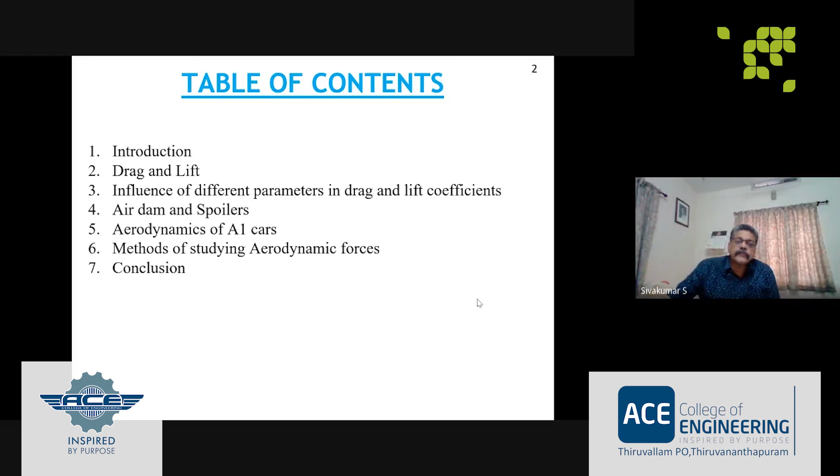First, let us see what is aerodynamics. In simple words, we can define aerodynamics as study and analysis of different forces acting on a body moving in air. When a body moves in air, there will be different types of forces acting on it. A study of that is known as aerodynamics. It has got application in different areas of engineering - aerospace engineering, design of automobile, prediction of forces and moments in ships and sails, in design of bridges and buildings, considering wind loads. Of this, our discussion is the second one, design of automobiles.

Now let us see what are the forces in aerodynamics: Lift, drag, weight, and thrust. Lift is the force acting normal to the direction of flow of air. If due to lift the body moves upwards, or if the direction of lift is upwards, we can say it is positive lift. And if the lifting force is downwards, we can say negative lift.

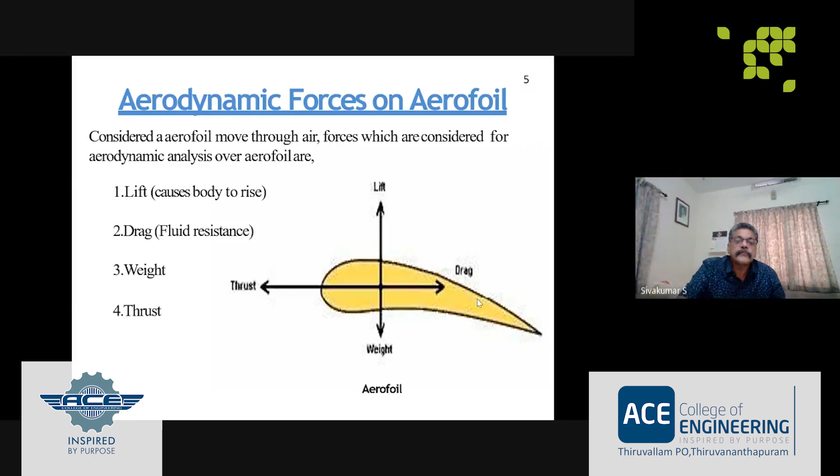So if you take a car, many parameters or factors are decided by the design of the car. I told you, one is fuel efficiency, then appearance of the car, stability of the car at high speeds, and noise level. These are the advantages of aerodynamics principles in the design of cars.

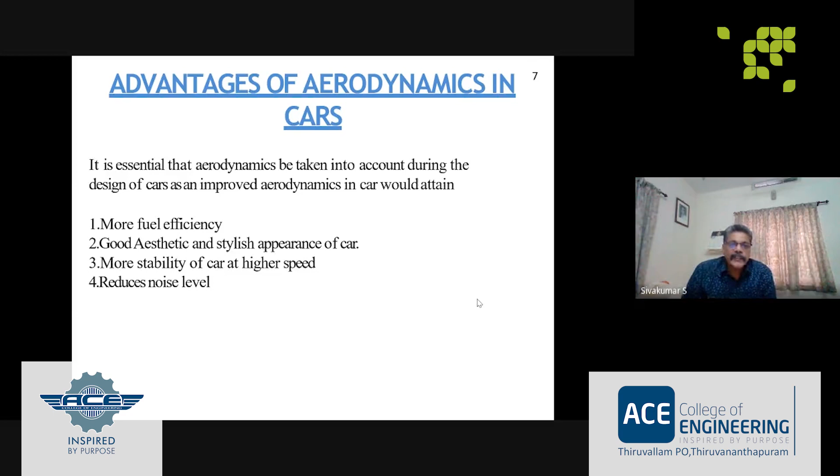I have already given you some idea about drag force. Here you see the expression F is equal to half CDA V square, where F is the aerodynamic drag force, that is the drag force created in the frontal area due to pressure of air acting on the frontal area.

And C is the coefficient of drag. Coefficient of drag is a measure of drag force. And A is the frontal area. And V is the velocity of the object.

So when a body with frontal area A is moving with velocity V in air, the drag force created will be half CDA V square. Here we can say the drag force created depends on the coefficient of drag and the square of the velocity.

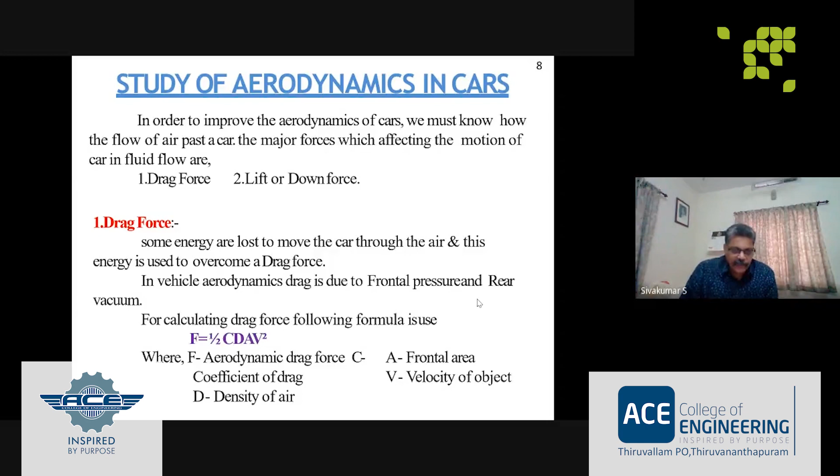I have told you about drag coefficient. Drag coefficient is a measure of aerodynamic efficiency, and this drag coefficient varies with the shape of the body. Here, the drag coefficient for some of the shapes are given.

For sphere, the drag coefficient is 0.47. Half sphere, 0.42. And streamlined body, it is very less, like a teardrop. For a streamlined body, it is 0.04. And streamlined half body, it is 0.09.

These are the drag coefficients calculated by conducting tests on different shapes. And we have seen the drag force depends on coefficient of drag. So the thrust you require depends on the shape of the body.

Where if a car with teardrop shape, that is a streamlined body, moves in the air, it may require only very less force to overcome the drag, because the value of CD is very less, 0.04.

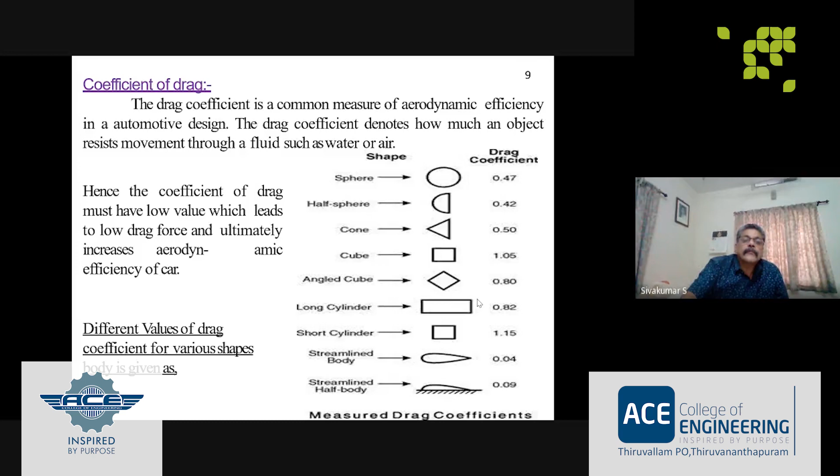Now let us see what happens when a flat plate moves normal to the air. It's moving in the forward direction, so air pressure will be acting against the body. It is kept normal to the flow, so air pressure will be acting on one side. As it moves through the air, it will be continuously replacing the air in the volume of space it occupies. So what will happen? Vacuum will be created in the rear end.

When vacuum is created, what will happen? After crossing the body, the air particles will be rushing towards the center, so some sort of turbulence will be created. This is the movement of a flat plate normal to the airflow.

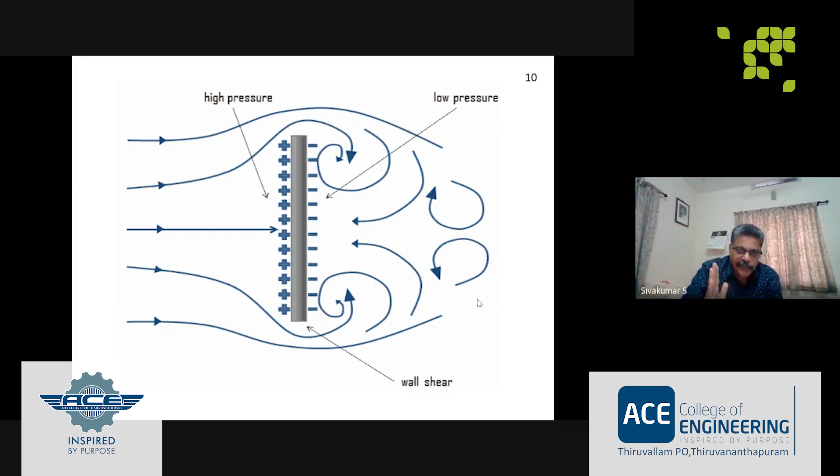You may think, why is this important here? When a car moves in air, first you start from the bottom. There is the bumper line, frontal area, then above that the hood, then windshield, then top of the car, rear window, trunk. So the air passes through different parts of the car, from the bumper, frontal area, hood, windshield, top of the car, rear window, and trunk. And the sideways flow will just be flowing over the doors.

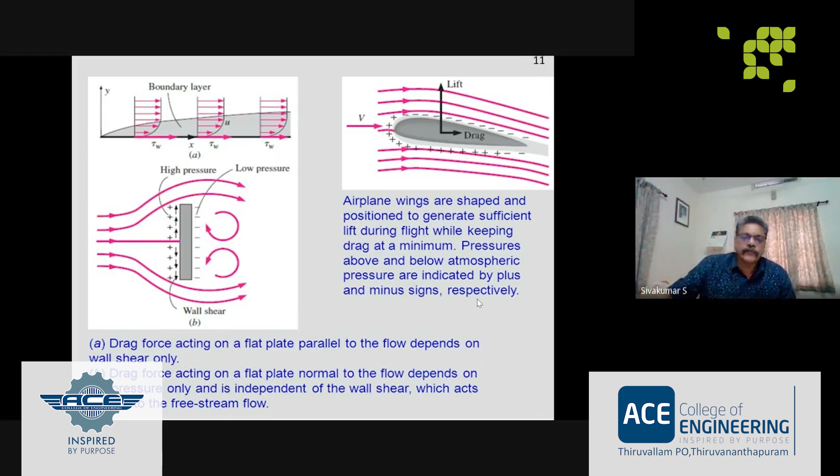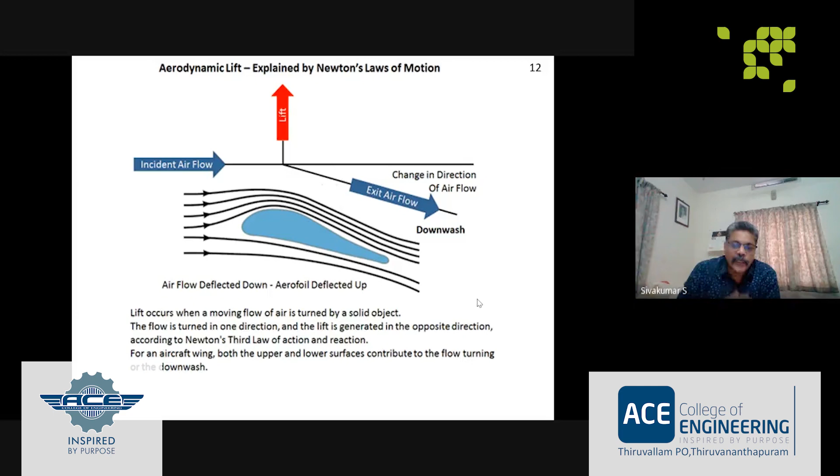Now, here the explanation is given using Newton's third law of motion. When air particles move over the wings, the speed increases at the top and is reduced at the bottom. According to Newton's third law, a lift occurs when a moving flow of air is turned by a solid object. After striking the surface, if the air particles take a turn downwards, then a force will be created in the opposite direction - that is the lifting force.

Now, the reaction of force on an inclined plate. We have seen what happens when a plate is kept normal to the flow of air, and what happens when it is kept parallel to the flow of air. Now, when it is kept at a particular angle, there will be two components: one is the upward force, that is the lift component, and the other is in a direction opposite to the movement of the vehicle, in the direction of air. That is the drag component.

Now let us see what happens to the upward force and the backward force when the angle of inclination is changed. This angle is very important. Take the bonnet, it is at a particular angle with a slight inclination. Take the windshield, it is also at a particular angle. So the lifting and dragging forces are decided by all these parts. So, reaction force on an inclined plate.

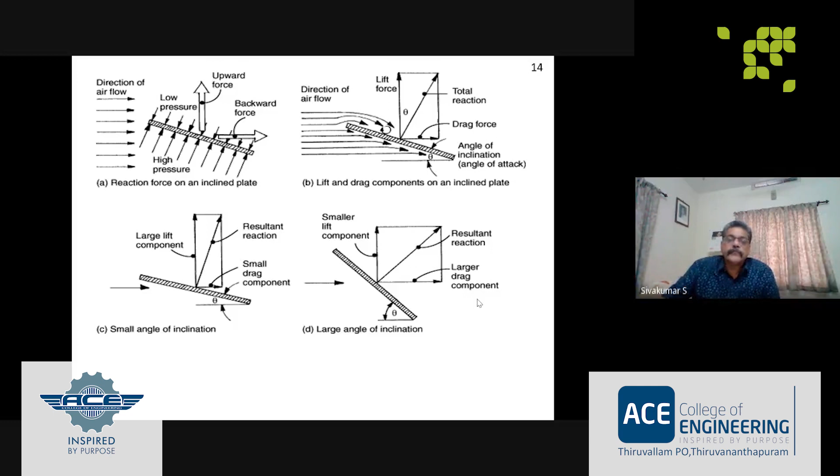Now let us see what happens when the air flows over a streamlined body. We have seen the teardrop shape. When the air particles move over the body, if it is a streamlined body, there will not be any separation between the air and the surface of the body. The air will flow over the body along its surface till the rear end and come out.

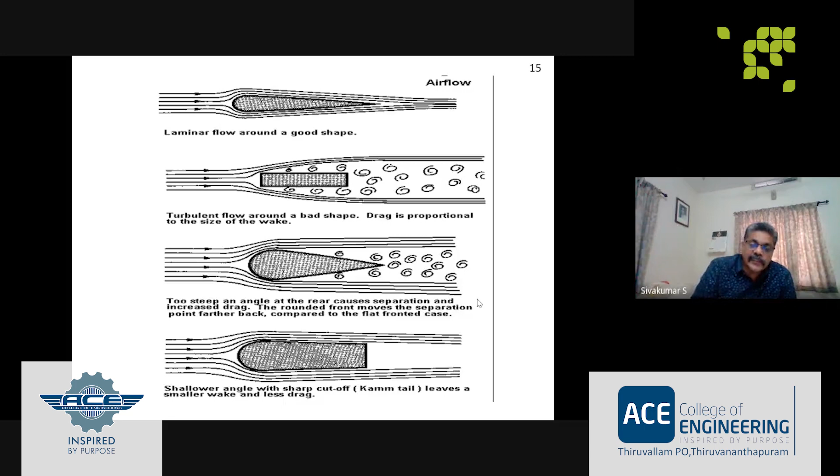Take the last one, the shallower angle. The angle of inclination of the fourth one is lesser than the previous two. So what happens? It's a streamlined shape, but at the end there is a possibility for wake, though it happens only after the rear end, so the effect will be less. Air particles strike the body, move along its surface, and cross the rear end.

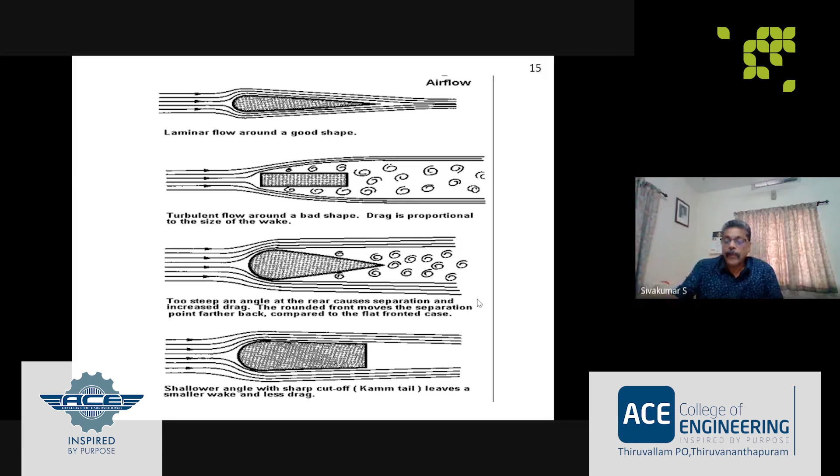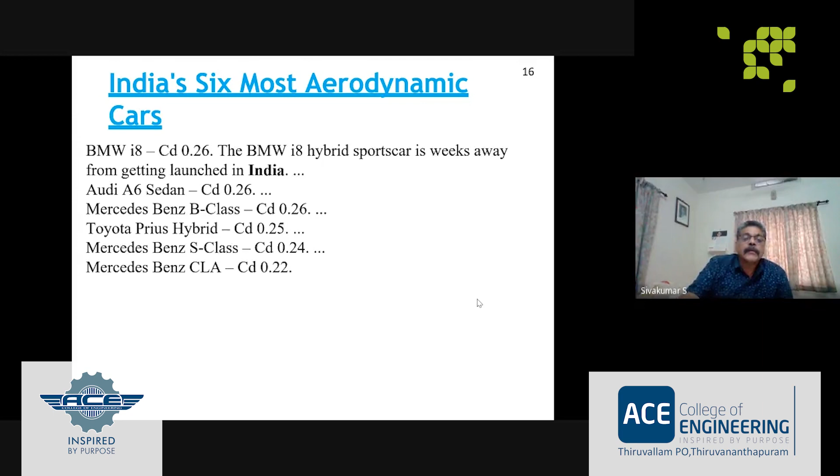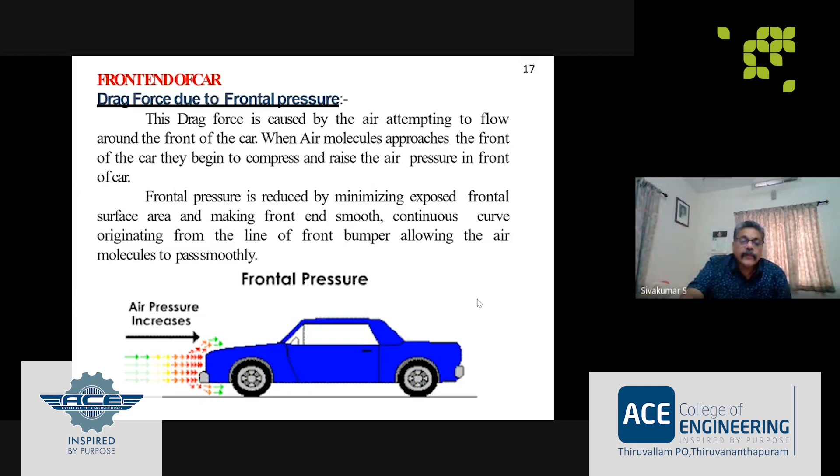What happens when air flows over the roof of the car? In certain cases, when it moves over the roof, the air particles continue to move in that direction, so there will be flow detachment. Due to the flow detachment, the air particles rush towards the vacuum created behind the window and the trunk.

As the air particles move over the roof, they continue in that direction, so there will be flow detachment. Due to flow detachment, a vacuum will be created, and that creates the rear vacuum. Due to the rear vacuum, there will be drag.

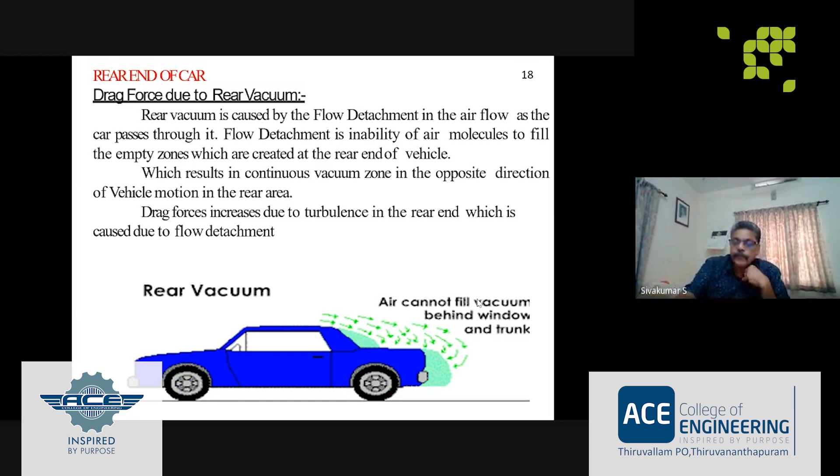Then when it moves over the roof, normally the velocity will be high, so the pressure will be less, so there will be a lifting force. Now you see the backside. When the air particles continue to move, what happens behind the window and above the trunk? There will be a vacuum created, so there will be a lifting force, because air is flowing to the bottom also. The lift is the force acting upwards, and it is created mainly due to the pressure difference between the bottom of the car and the top of the car.

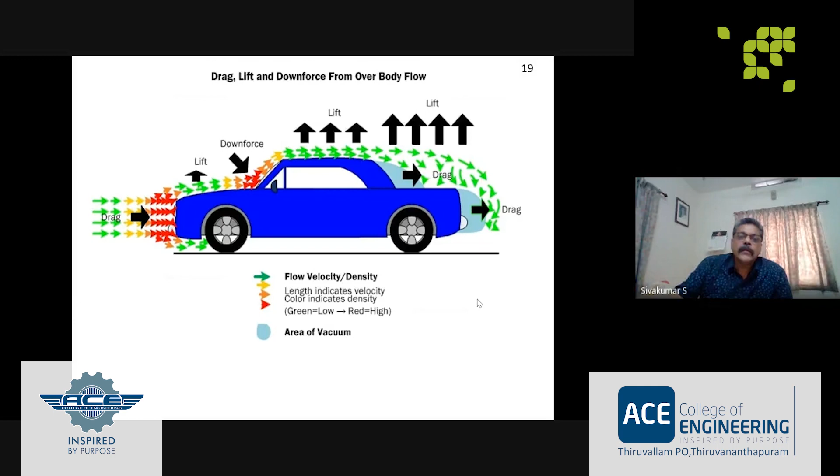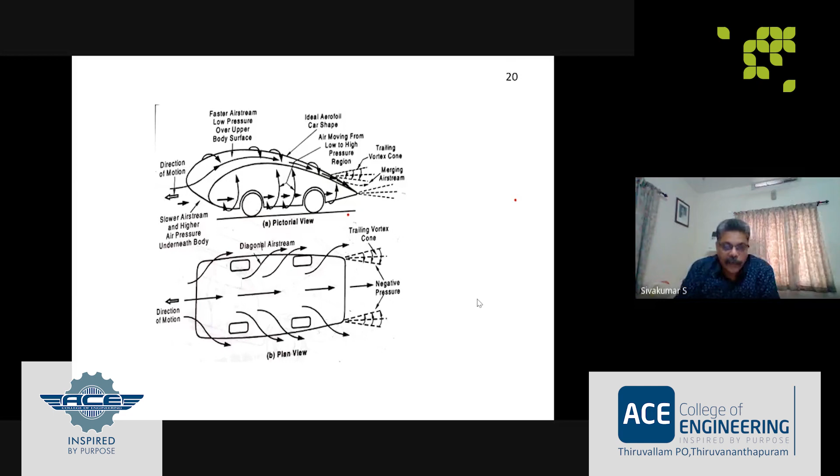What will happen if the car is lifted? The driver may lose control. This may happen at very high speeds. When the speed is very high, if there is considerable coefficient of lift, there is a possibility that the contact between the tire and the road may be lost. When there is no contact between tire and road, the driver may lose control.

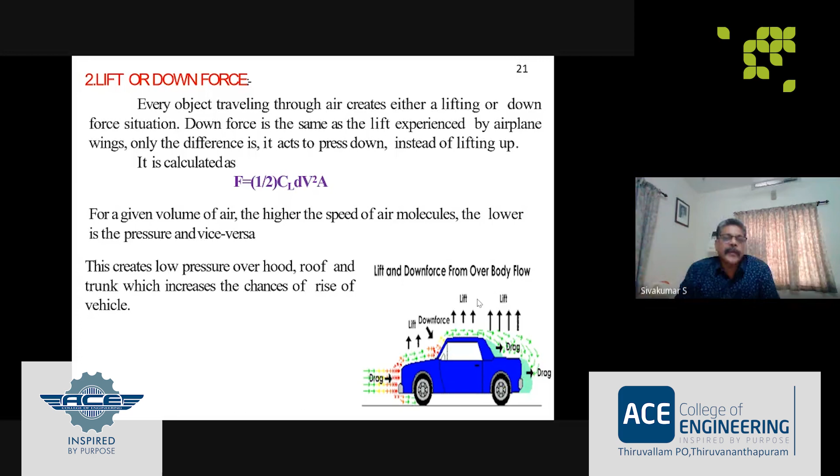Now, one thing we know in case of coefficient of drag: by streamlining the body of the car, the separation points can be shifted beyond the rear end. So the drag can be reduced.

And like that, the coefficient of lift can also be controlled by making small variations in the shape of the car, because the coefficient of lift is decided by the shape of the car only. If there is provision for reducing the pressure of air at the bottom of the car and increasing the pressure at the top, then there will be a downforce.

This downforce can be created because at high speeds, if there is a lift created, and if the lift is more than the weight of the car, then the car may be lifted from the ground and the driver may lose control. To avoid that, we can make small provisions in the car to keep the pressure below the car to a certain level. There are many parameters we will see one by one.

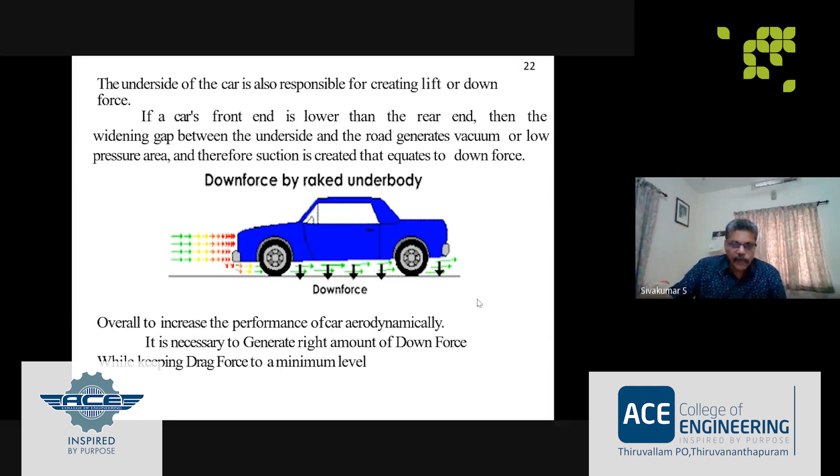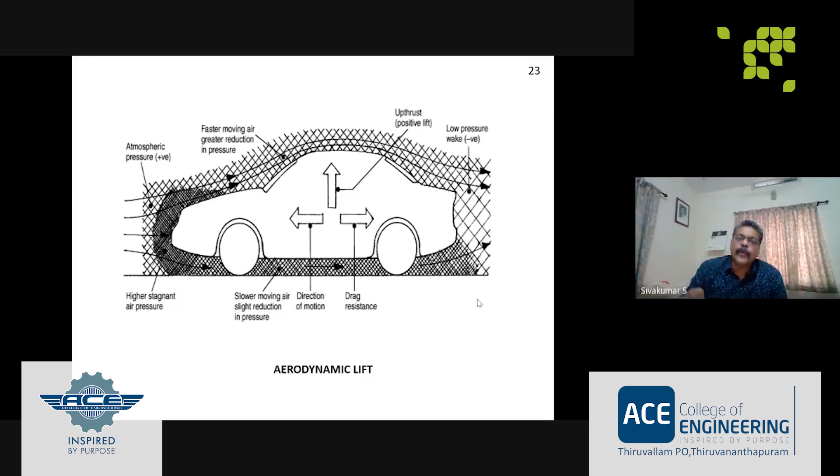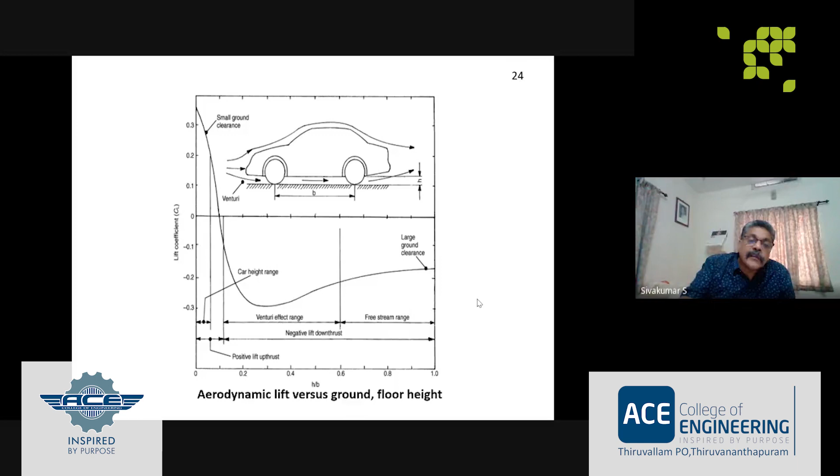You would have noticed if the gap between the car and the road is very less, then there is a possibility for positive lift. And if it is moderate, you can see how the lift coefficient varies with H by B. So make it a point, lift coefficient varies with floor height. The floor height can be varied and we can control the lift coefficient. This is what we have already discussed.

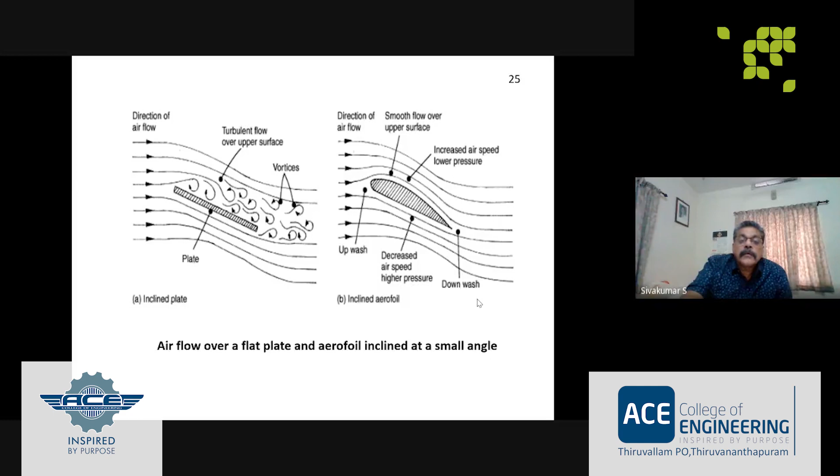Now, front end nose shape, the front side, the bumper area here — you can keep the nose tip either pointing downwards, pointing at the center, or pointing upwards. The conditions will be different for different positions.

Suppose if it is pointing downwards, what happens? Only a very small quantity of air will be flowing through the bottom, and most of the air particles will be moving above the car. The diagonal flow will not be there, or even if it is, it will be very small.

Then if the tip is at the center, there will be flow above and below the car. And if the tip is pointing upwards, what happens? More air is going to the bottom of the car, and only a very less quantity flows above the car.

In that case, what can happen? More quantity of air flows to the bottom, very little air moves above the car, so the pressure at the bottom will be high. There will be airflow from the bottom to the top. You can see the airflow above the car is less, so the pressure will be less at the top. Below the car, more quantity of air is there, so pressure will be slightly high.

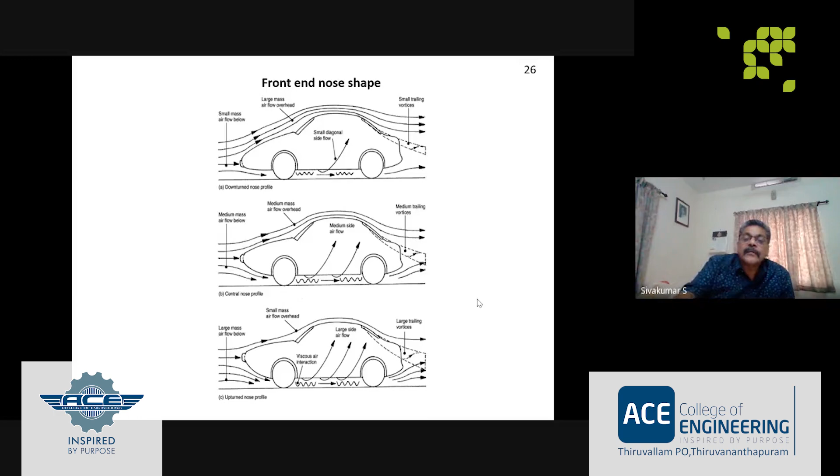So the air will start moving from the bottom to the top, and that will lead to some vortices, because there is flow in different directions. Some vortices will be created at the rear end.

Now, there is a wind tunnel setup, an experimental setup, which is used to study the forces acting on a body. You can make a prototype of the vehicle and keep it inside the wind tunnel. In the wind tunnel, there is provision for passing air at different speeds, so using that provision you can vary the speed of air flowing through it.

The body is already kept there. You can make prototypes in different shapes, keep it inside the wind tunnel, and send air at different speeds. You can study the forces acting on it, and from that it is possible to calculate the value of CD and CL.

CD is coefficient of drag, CL is coefficient of lift. Here, upward nose, central nose, and downward nose, three different prototypes of same dimensions are tested in a wind tunnel, and the results are as follows. For upturned nose, CD is 0.24. For central nose, CD is 0.223. Downturned nose, 0.224. There is no much difference in CD, almost the same, only a slight difference.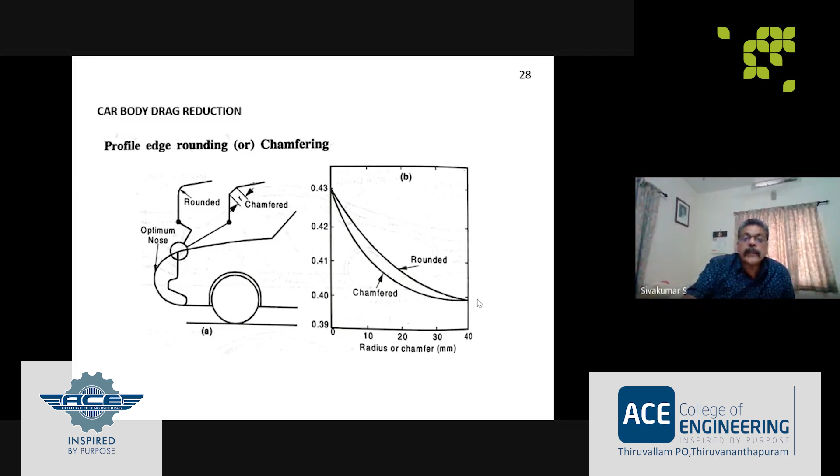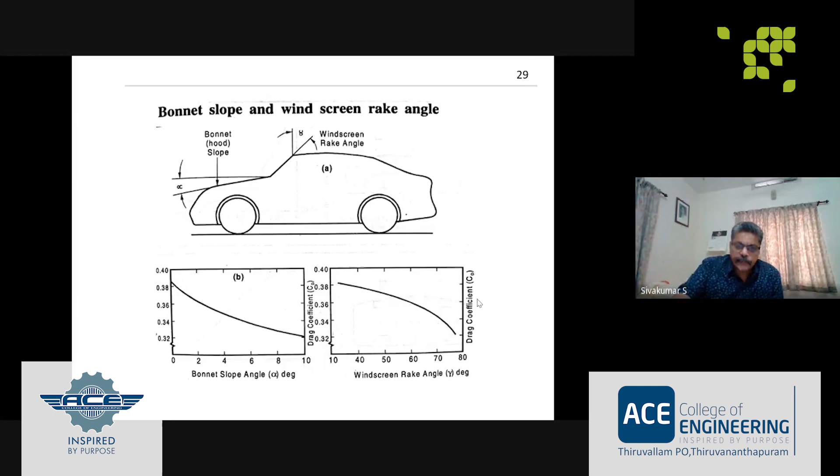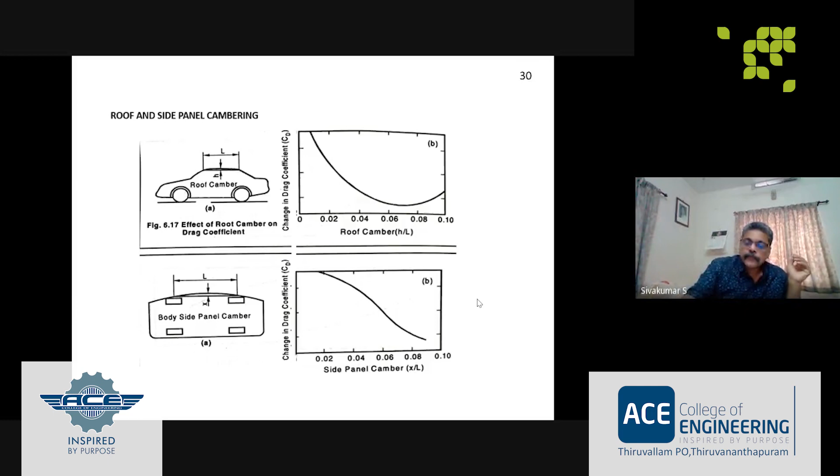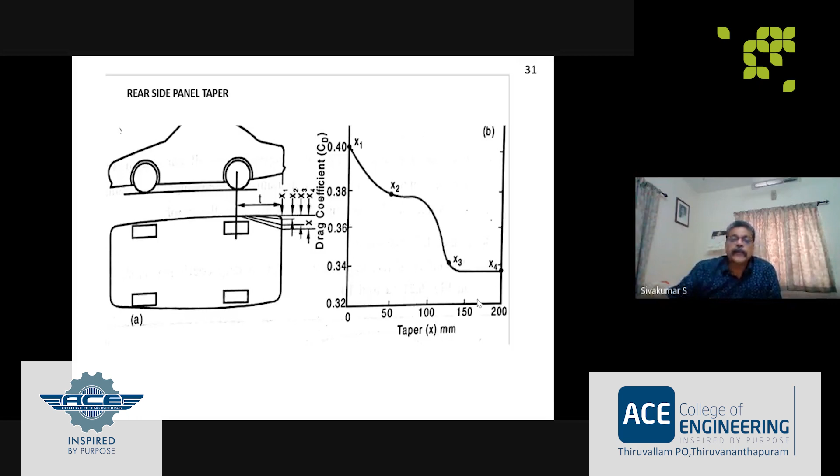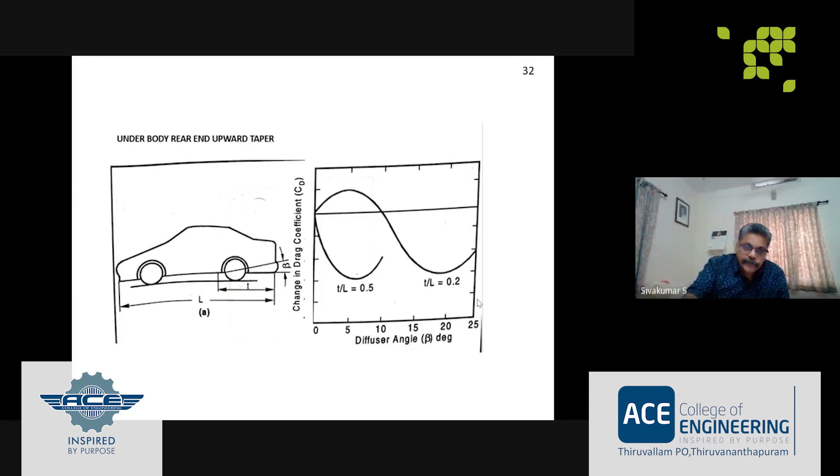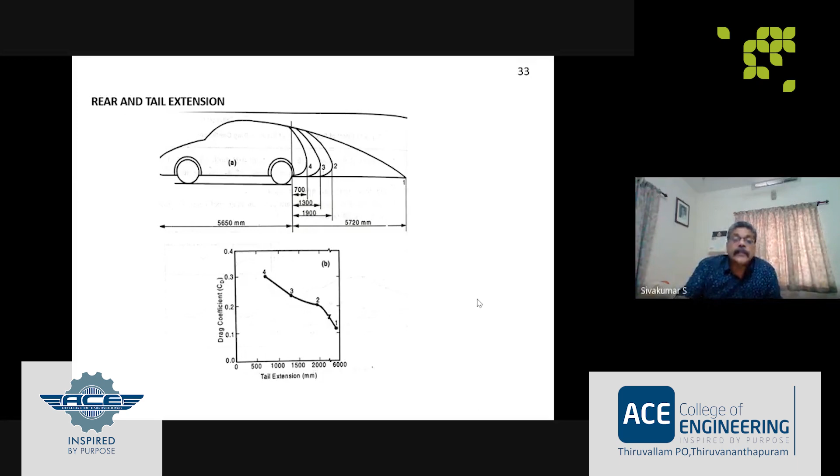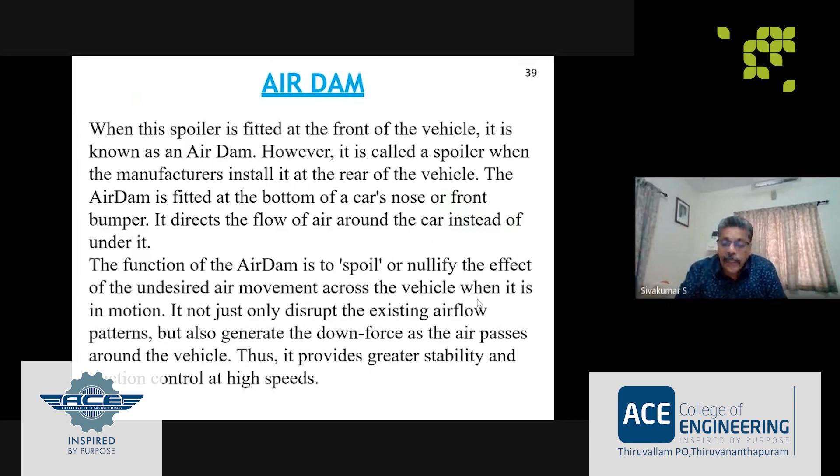Then air dam, I'll show you if it is clear. If a spoiler is provided in the front of the car, it is known as air dam. Air dam directs the flow in different directions.

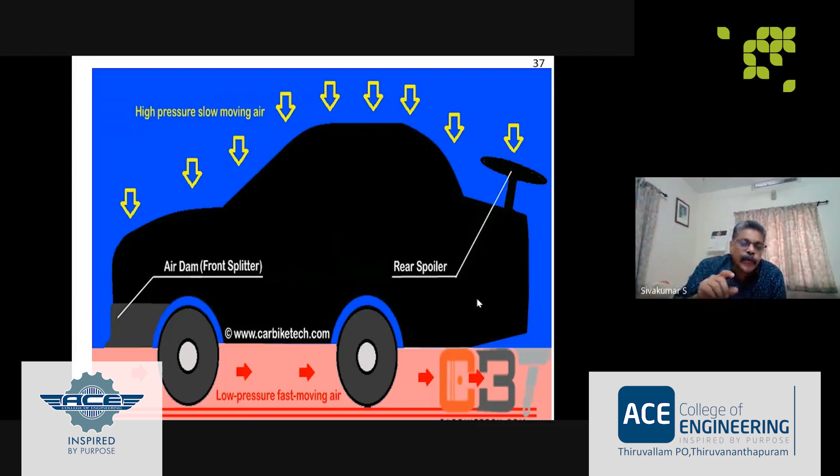So the quantity of air flowing through the bottom will be reduced. When the quantity of air flowing through the bottom is reduced, naturally there will be less pressure. When less pressure is created, and at the top if there is high pressure, the car will be pushed downwards, and there will be very good contact between tires and roads.

Yes, see, air dam is provided in the front. Spoilers you can provide at the rear end, and there is low pressure because this air dam directs air sideways also. So the quantity of air entering the bottom of the car will be less, so low pressure will be created there. At the top, more quantity of air flows over the top.

Because it is the purpose of the air dam to direct air in different directions, it will reduce the flow of air through the bottom and increase the flow of air through the top. So at the top, high pressure, slow moving air will be pressing the car against the ground. So always there will be a push downwards.

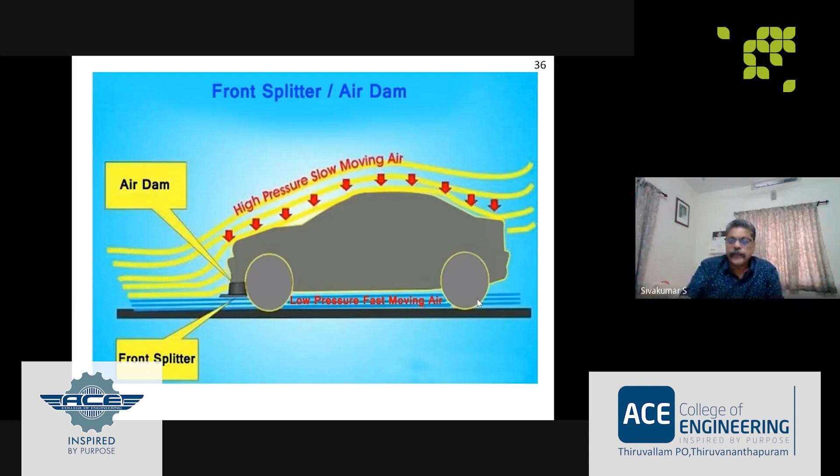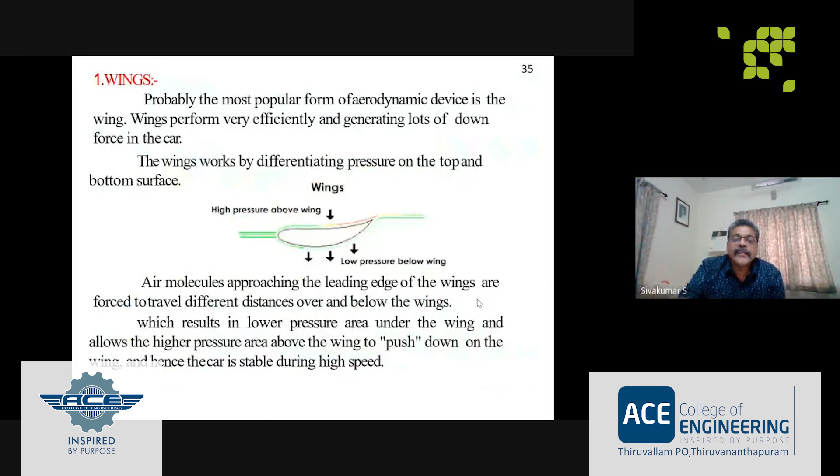Then scoops, you would have noticed in cars, on the front side. The purpose of scoop is something different. Here, this is scoops at the center. There is an opening, and what happens is when air is approaching the front side, air will be getting into the scoops. And what happens there? We'll see.

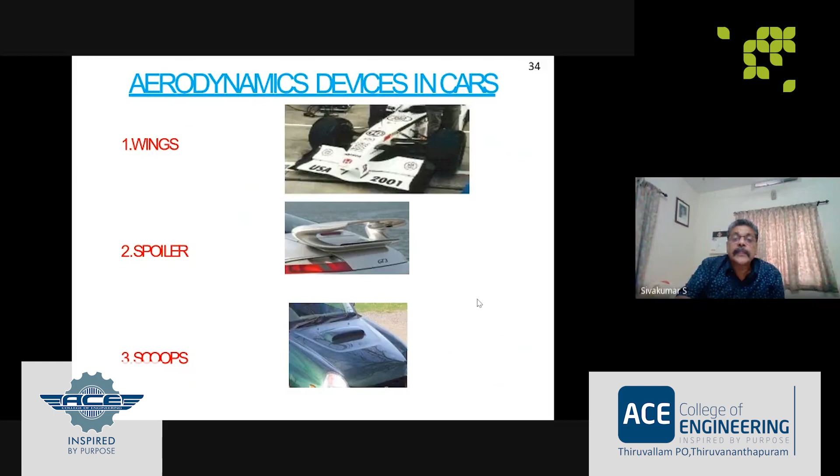When air enters through the narrow opening and passes through the scoop, it will be compressed. Yes, there is a change of direction also. Air compresses in the airbox as it slows. And this compressed air will be supplied to the engine. When it is compressed, the density of air increases, so the volume of air getting into the cylinder will be more.

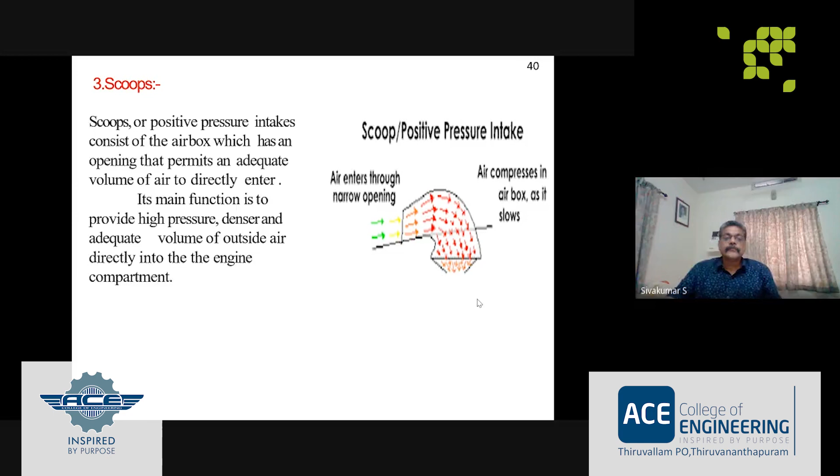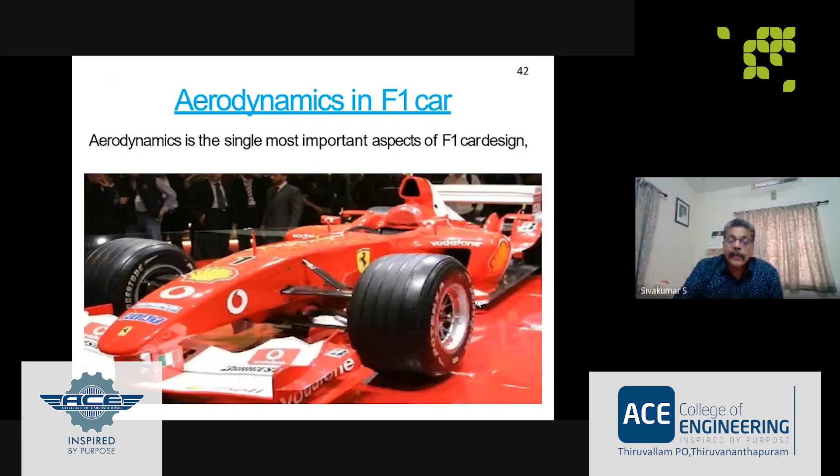Now F1 cars, Formula 1 cars, and most of you would have seen Formula 1 cars in videos. Here, Formula 1 cars are mostly single seat cars, open cockpit, open wheels. Then wings are there at front and rear. What is the purpose of wing? To create downward force. Yes, this car will be moving approximately around 375 kilometers per hour.

This is a racing car. When it moves at a speed of 375 kilometers per hour, if there is a lift created and if there is no contact between tire and the road, the driver may lose control. In order to avoid that, wings are provided at front and rear end.

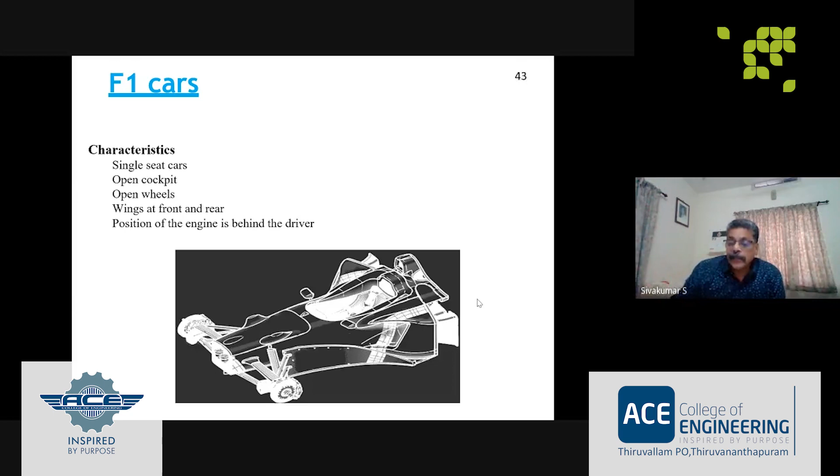And the position of the engine is always behind the driver. The cockpit is a very sparse environment. The driver has limited movement, and designers are forever trying to lower the center of gravity of the car. The reason is if the center of gravity of the vehicle is brought to the bottom, lowered further and further, the advantage you have is the stability of the car.

And all of us know whether in a body, if the center of gravity is lowered, there will be more stability. And in F1 cars, there are a lot of companies, Lotus, Williams, Mercedes, Red Bull. Like that, there are many companies producing F1 cars. And here, the point is how the coefficient of lift is controlled in F1 cars.

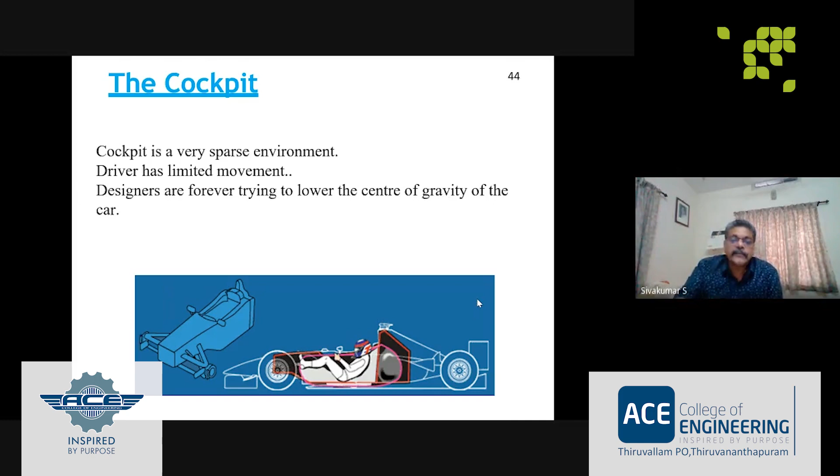Now, I have already mentioned about wind tunnel. Wind tunnel is an experimental setup to study the aerodynamic forces acting on a prototype. If you have a vehicle, you can make a prototype of it. You can keep the prototype inside the wind tunnel and allow air to flow over the body at different speeds, and study different forces.

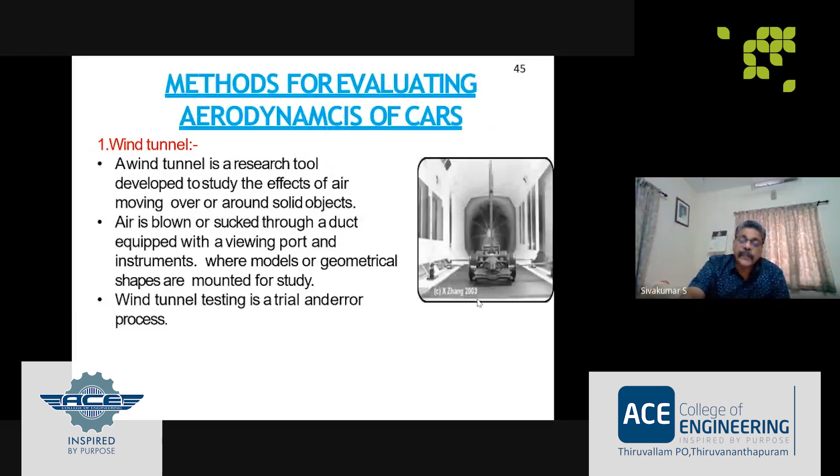From the forces you can calculate coefficient of drag. Wind tunnel testing is a trial and error method, but there are so many softwares available, like CATIA, Hypermesh, Fluent, CFD software. There are so many softwares available. Using these softwares, we can study aerodynamic forces.

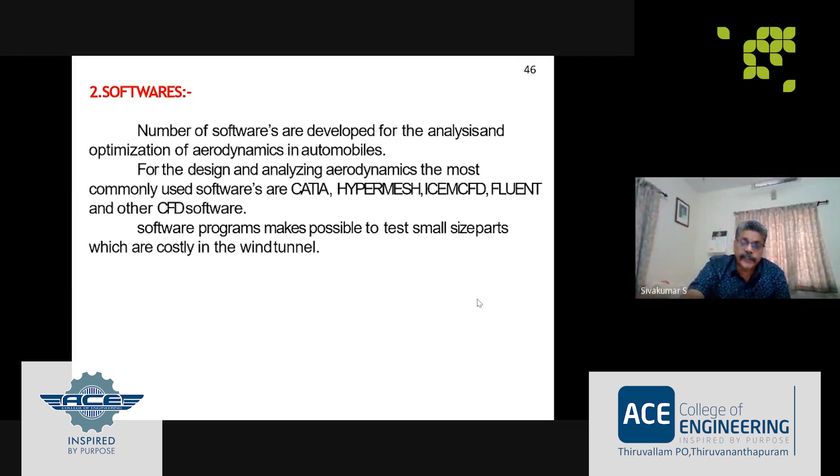We have to create a model and test the model under different conditions, and we arrive at a conclusion.

All of us know that the shape of cars influences drag coefficients and lift coefficients to a greater extent. When someone selects a car, they may consider many factors, and the most important factors are fuel efficiency and stability of the car. This fuel efficiency and stability at high speeds depends on drag coefficient and lift coefficient. The appearance of the car is also important, and noise level is also important, which also depends on the shape of the car. So we have to take care of these factors during the design of the car.

I think you have enjoyed this session. Now the topic is open for discussion. Participants can ask any doubts they have.